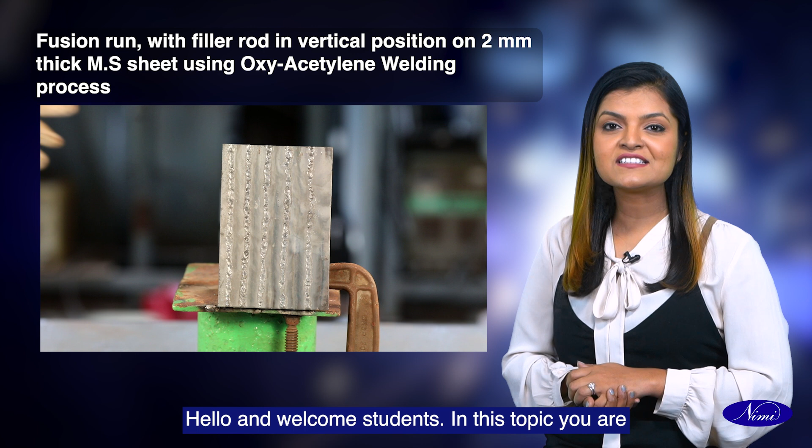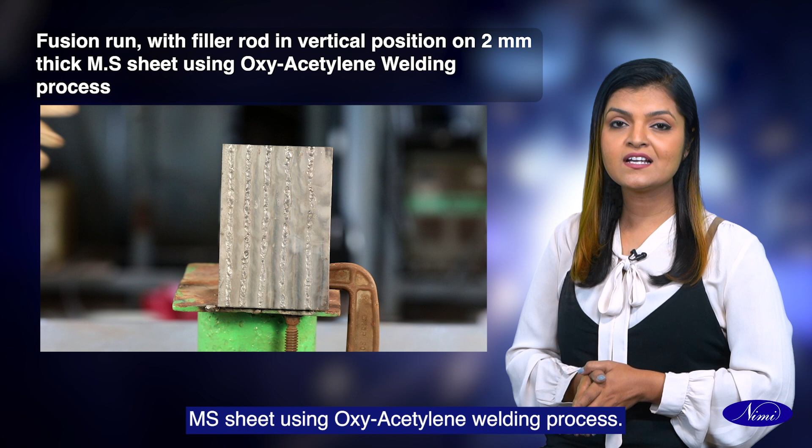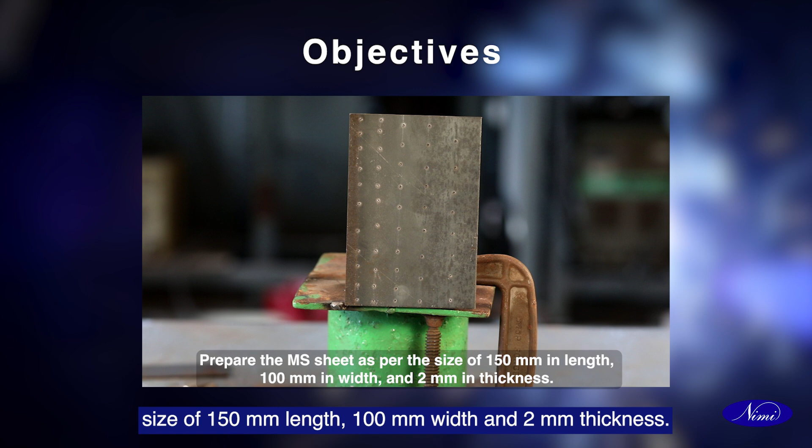Hello and welcome students. In this topic, you are going to learn about performing fusion run with filler rod in vertical position on 2 mm thick mild steel MS sheet using oxy-acetylene welding process. At the end of this topic, you will be able to prepare the MS sheet as per the size of 150 mm length, 100 mm width and 2 mm thickness.

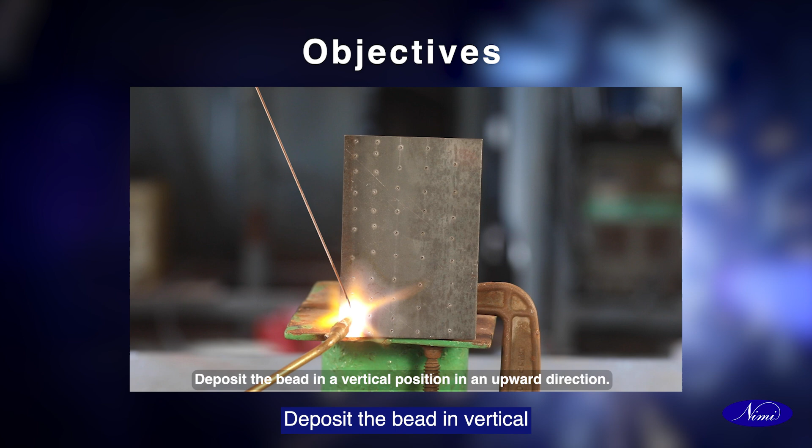Fix the job in vertical position in the weld positioner. Deposit the bead in vertical position in an upward direction. Inspect the bead for any surface defects.

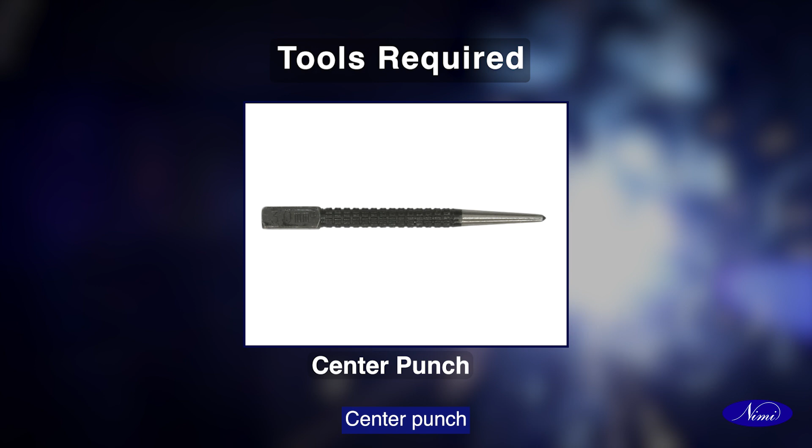Let us now look at the tools required for the OAW fabrication of fusion run with filler rod in vertical position on 2 mm thick MS sheet. Steel ruler, center punch, ball peen hammer, flat file,

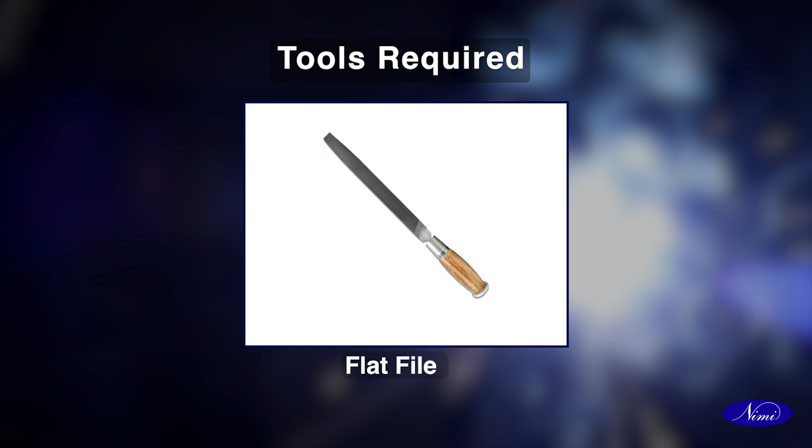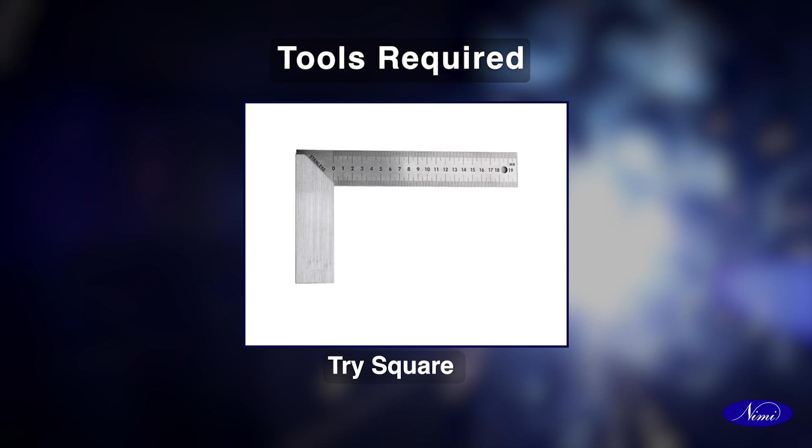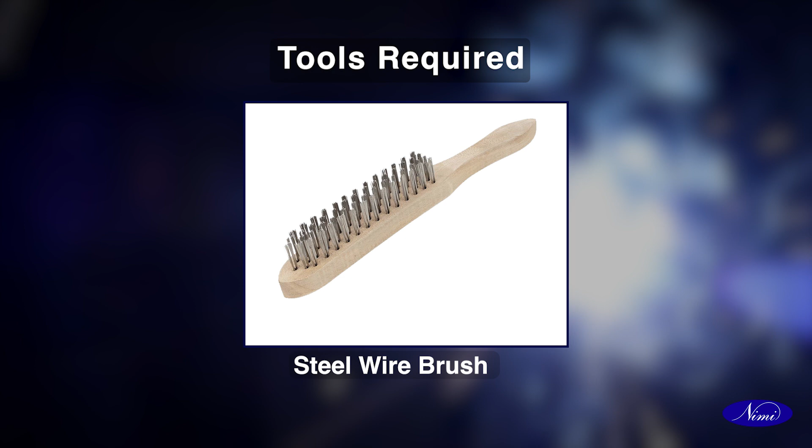bench vise, try square, chipping hammer, steel wire brush, safety clothing, gloves,

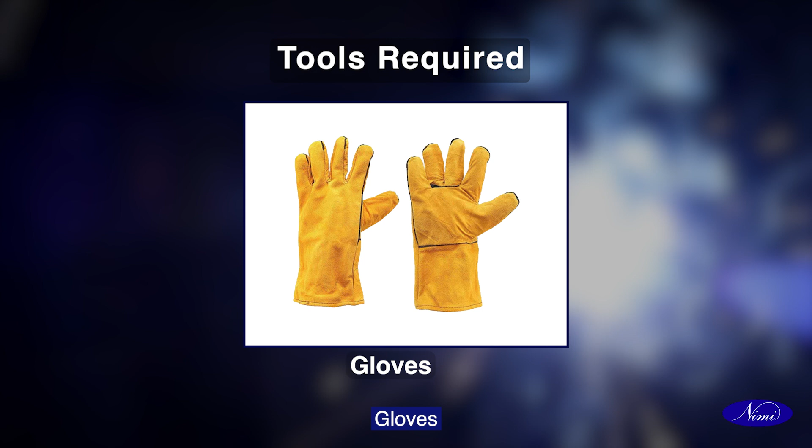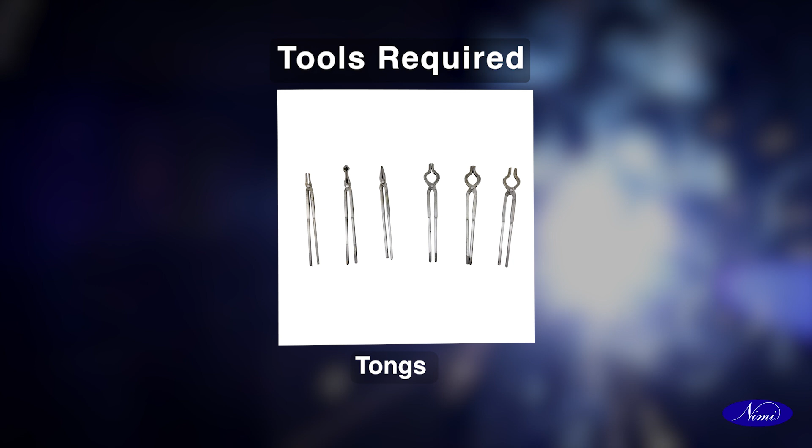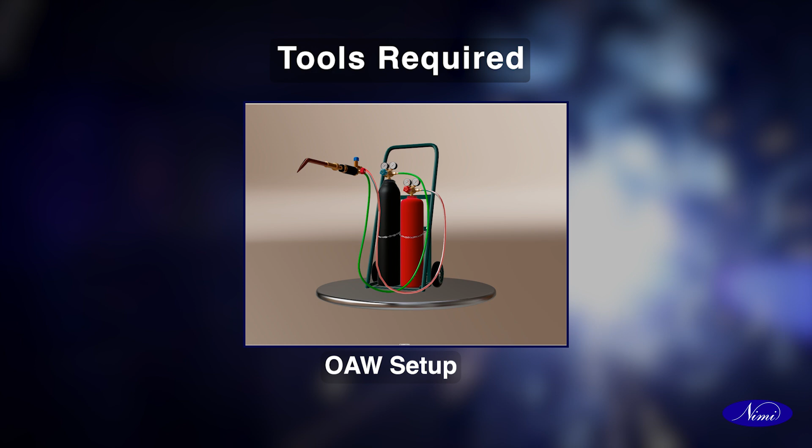PPE kit, nozzle number 5, tongs, CCMS filler rod 1.6 mm, OAW setup, cylinder key,

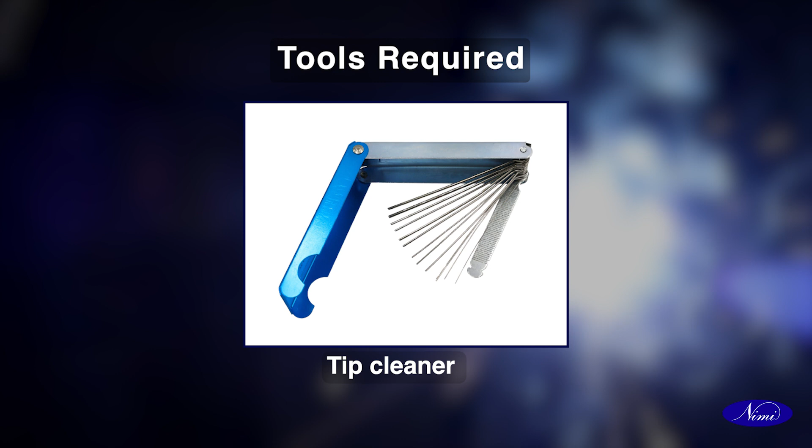tip cleaner, spark lighter, gas welding goggles.

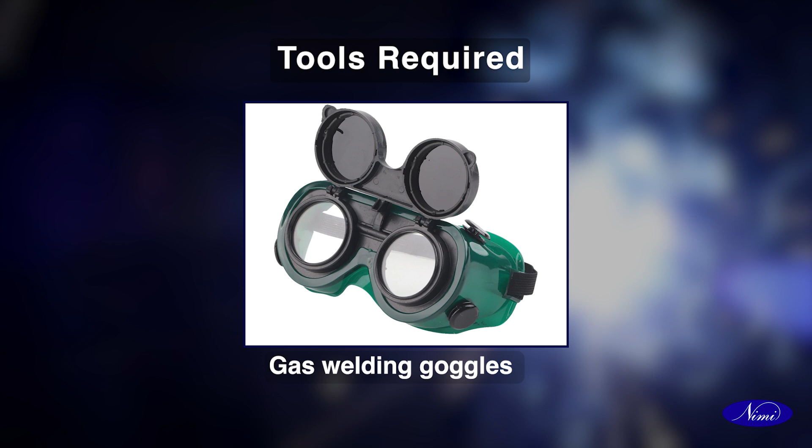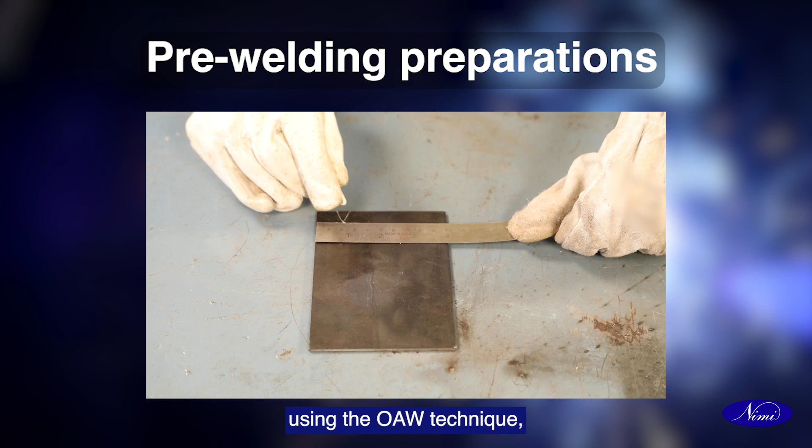Let us have a look at the pre-welding preparations for a fusion run with a filler rod in vertical position on a 2 mm thick MS sheet using the OAW technique. Follow necessary safety precautions. Cut the MS sheet as per the size 150 mm length, 100 mm width and 2 mm thickness.

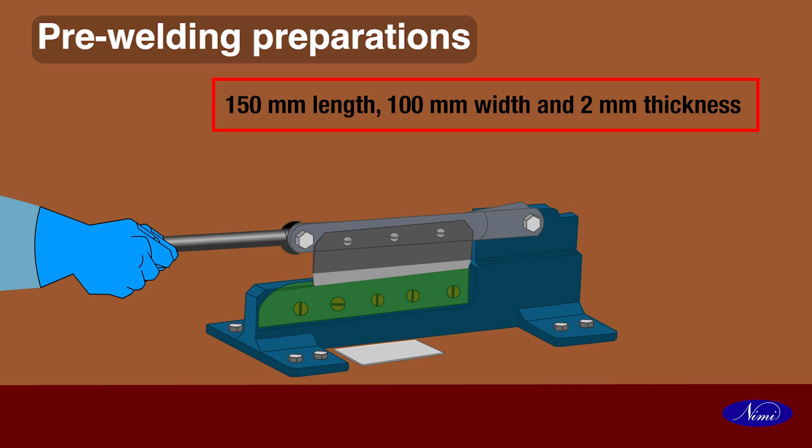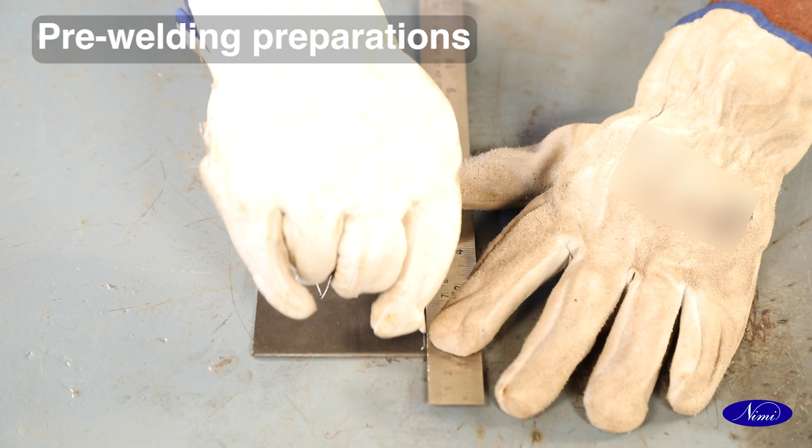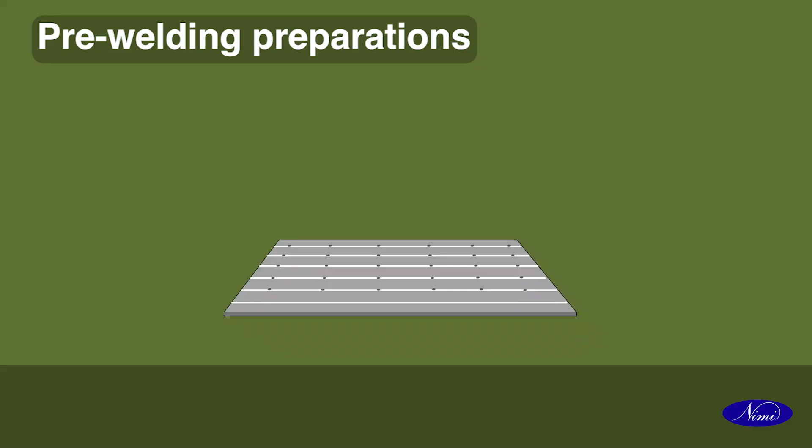Keep the MS sheet on the table and scribe straight lines using a ruler. Do the punch mark over the straight lines.

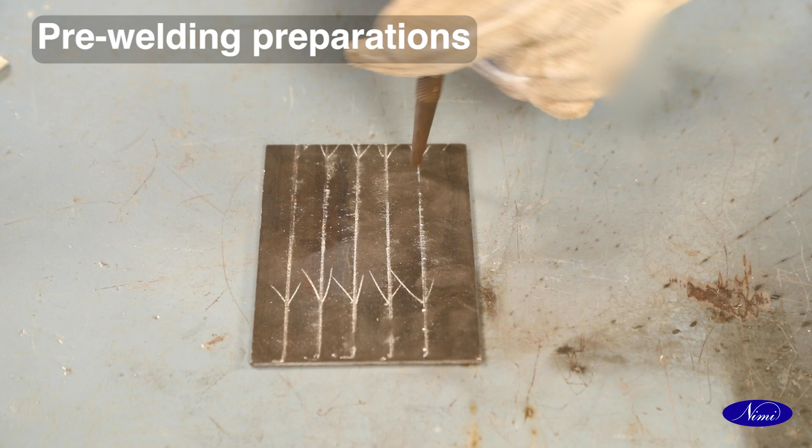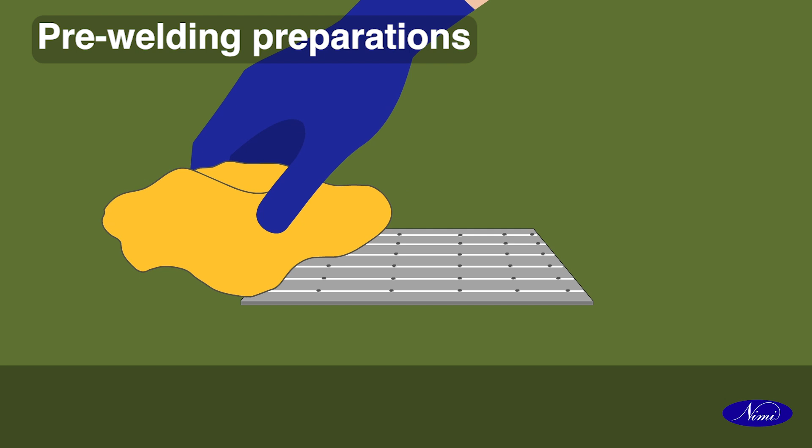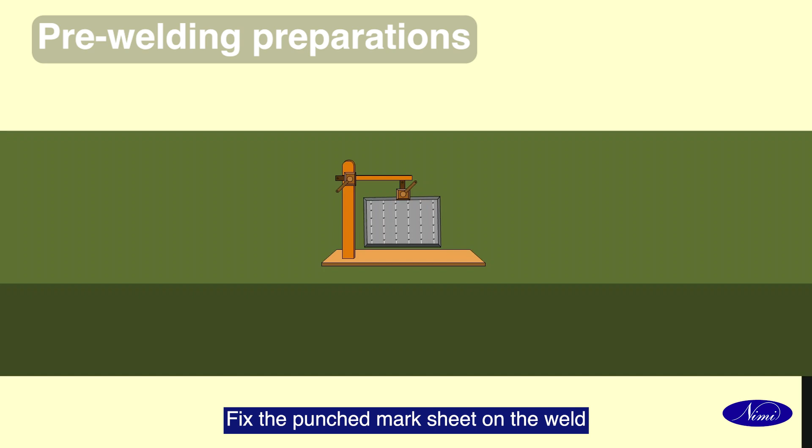Clean the surface of the sheet from oil or rust. Fix the punched mark sheet on the weld positioner in vertical position at a convenient height.

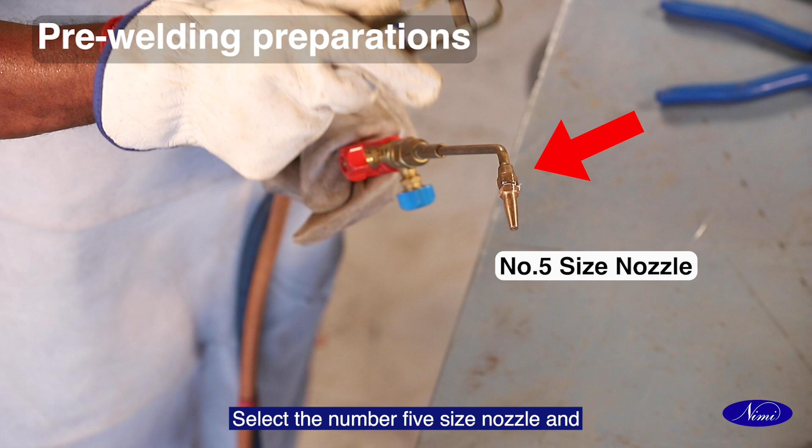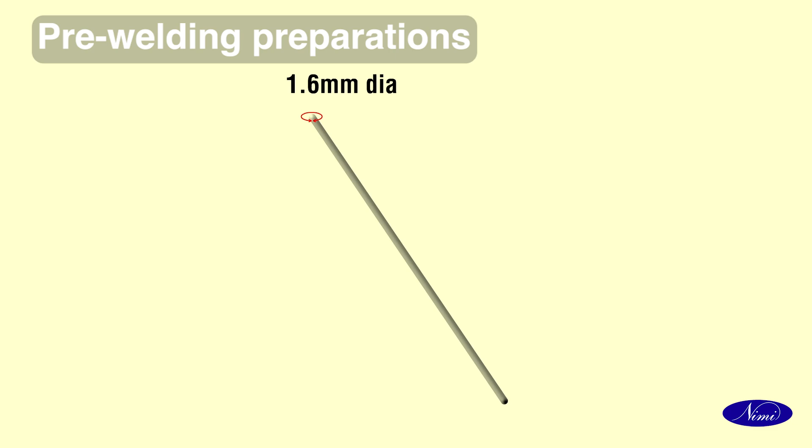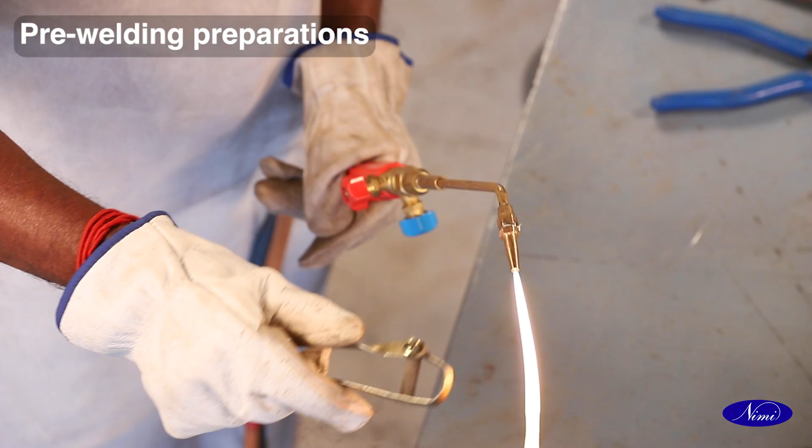Select the number 5 size nozzle and fix it to the blowpipe. Select 1.6 mm dia CCMS rod. Set 0.15 kg per square centimeter pressure for oxygen and acetylene gases. Ignite the blowpipe and set a neutral flame.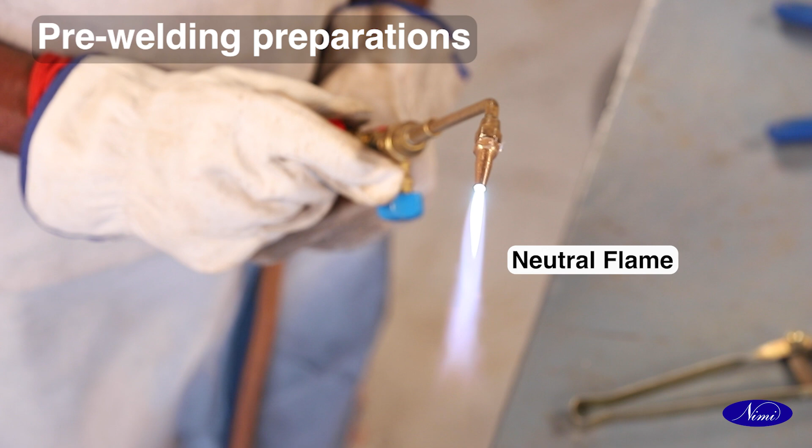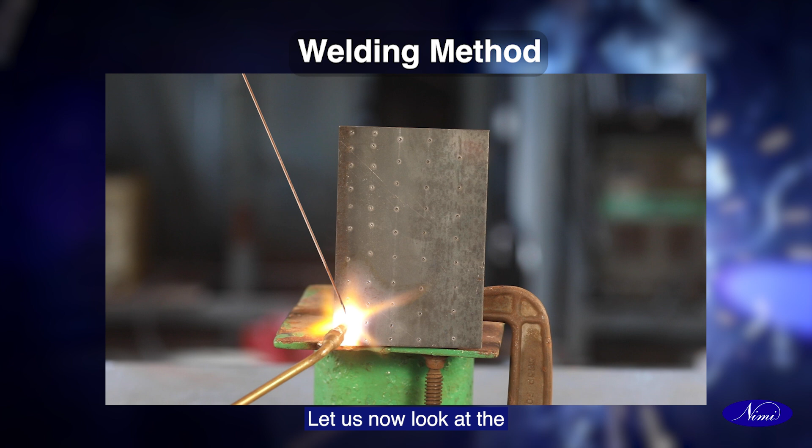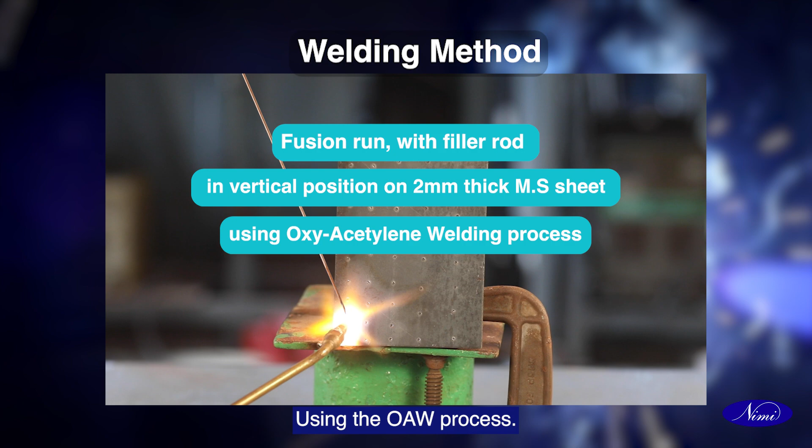Deposit the weld in a vertical upward position. Let us now look at the welding method for fabricating fusion run with filler rod in vertical position on a 2 mm thick MS sheet using the OAW process. The weld bead is deposited from the bottom of the punched line upwards.

Hold the blowpipe at 75 degrees and the filler rod at 30 to 40 degrees to the line of weld.

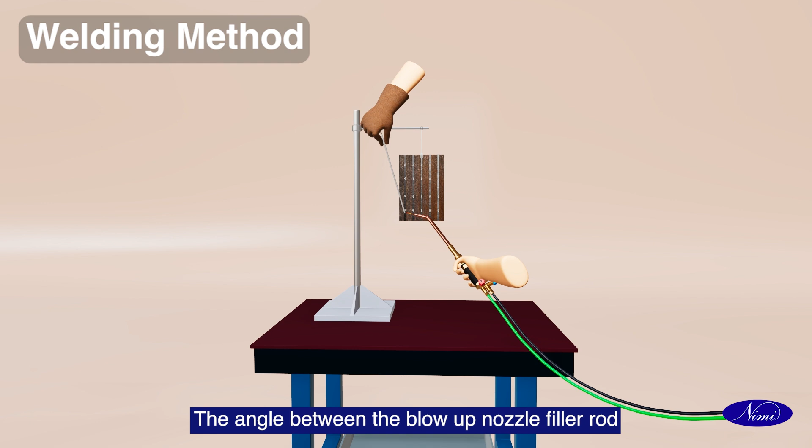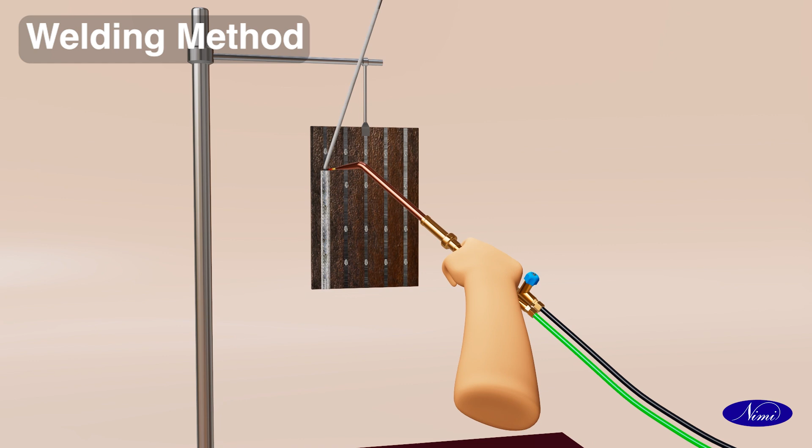The angle between the blowpipe nozzle, filler rod and the sheet surfaces should be 90 degrees. Ensure the melting of the base metal and the filler rod is kept to a minimum as possible. Maintain proper angles for the blowpipe and filler rod. Move the blowpipe and filler rod without any side-to-side movements. Move along the marked line at a uniform speed in an upward direction.

Do not allow the inner cone of the flame to come into contact with the molten metal to avoid a backfire. Completely deposit the weld bead up to the top end of the line and ensure to fill the crater. Ensure the undercut defects are avoided by proper manipulation of the blowpipe and the filler rod.

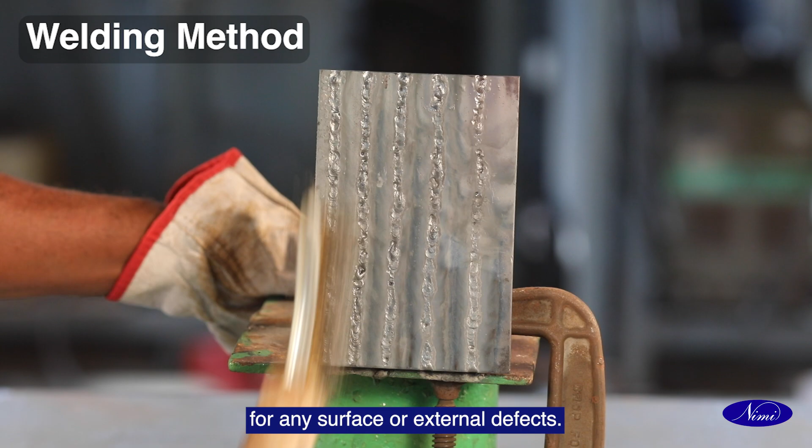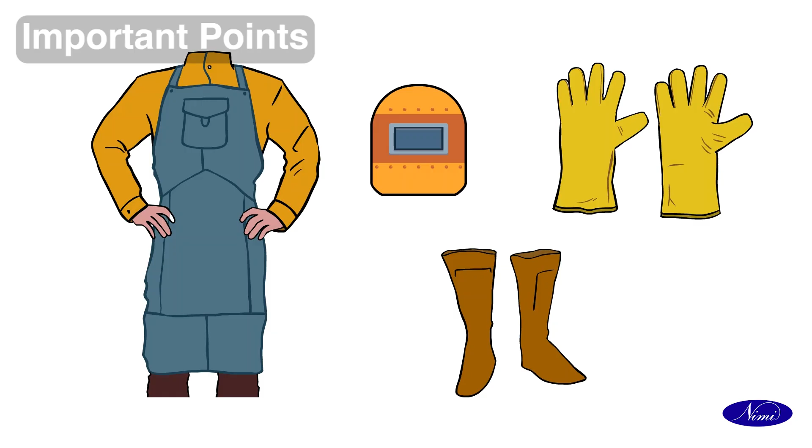Clean the bead and visually inspect for any surface or external defects. Now we will look at the important points to be followed for a fusion run with filler rod in vertical position on a 2 mm thick MS sheet by the OAW process. Wear protective clothing. Take due care that the weight of the blowpipe and hoses does not pull your hand downwards while the deposition of weld metal progresses upwards.

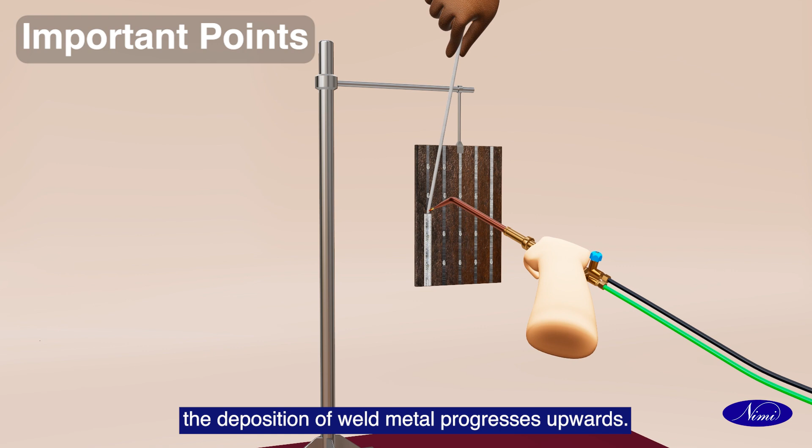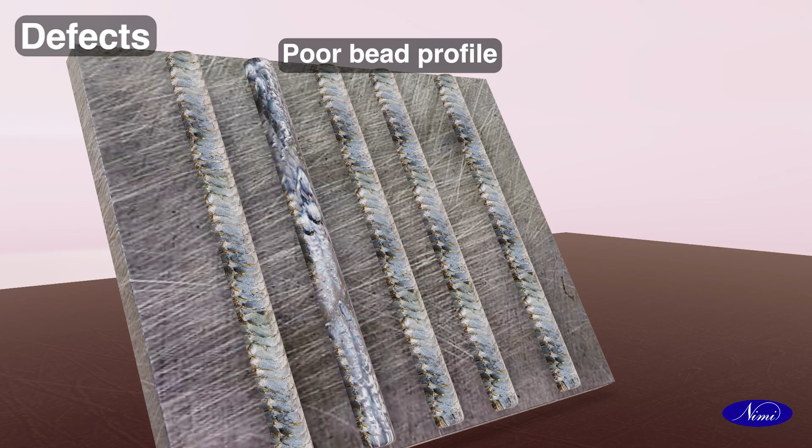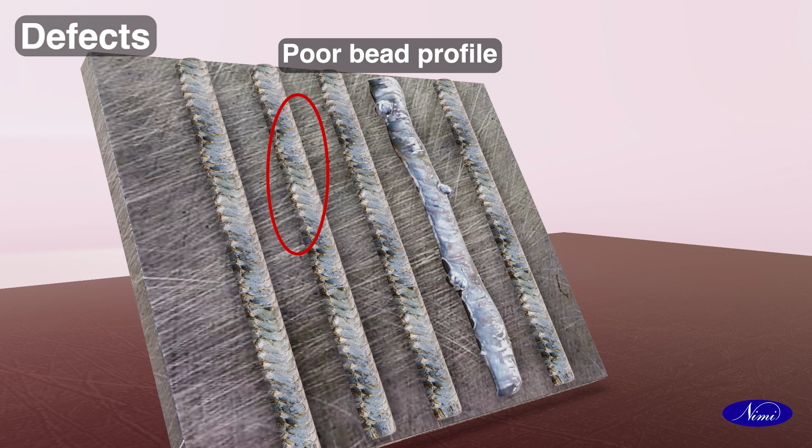Let us now see the defects. Undercut. Poor bead profile. Excessive reinforcement.

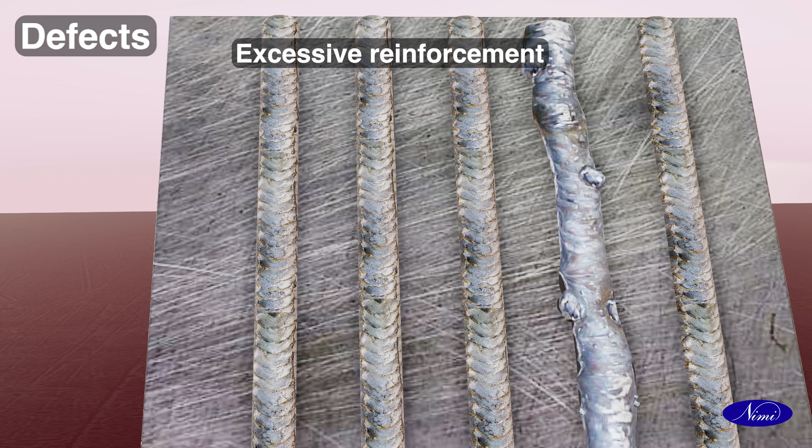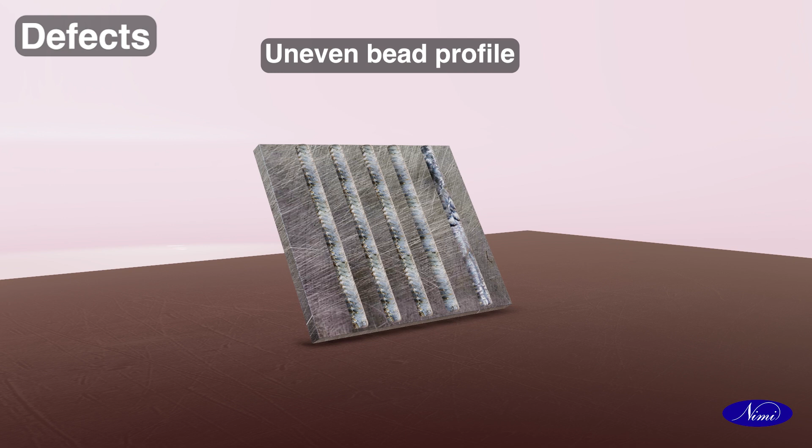Uneven bead profile. Recap. Prepare the MS sheet as per size 150 mm length, 100 mm width and 2 mm thickness. Fix the job in vertical position in the weld positioner. Deposit bead in vertical position in upward direction. Inspect the bead for any surface defects.